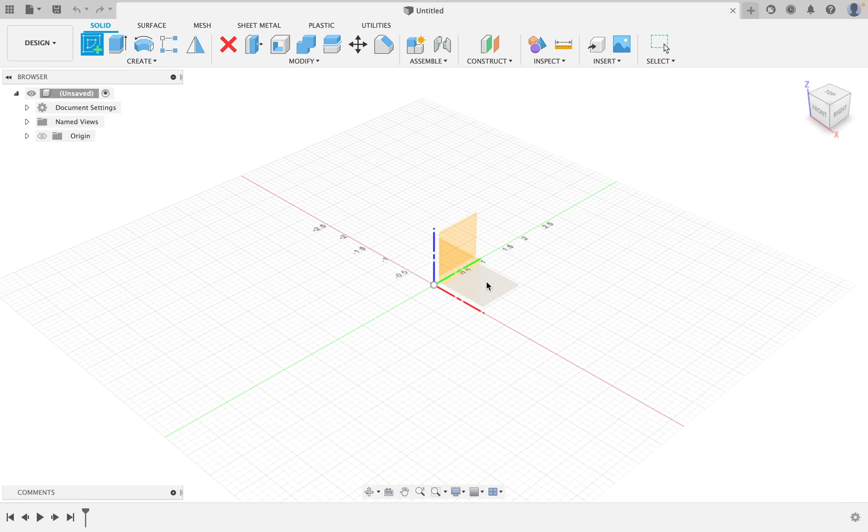We will start today with creating a new sketch, and we will create that sketch from the top, because that will give us the full dimensions, both the length and the width of the shelves. So we will make a shelf for our bookcase.

If I click on this dimension tool here, or push D, I can pick this line and say that it is going to be 23 inches long. I'll pick the outside line and say that's going to be 10 3/8 inches deep. And that is pretty much our shelf.

Now we're going to make some legs. Those legs are going to be offset, and they will be outside here on the corners. We're only going to bother to make one of them, and we will just match that one all the way across. We will hit equals and click on the two sides to turn those into square legs. Now all I have to do is give it one dimension, and those legs are going to be 1 inch and 7/8 square. They'll go on each corner.

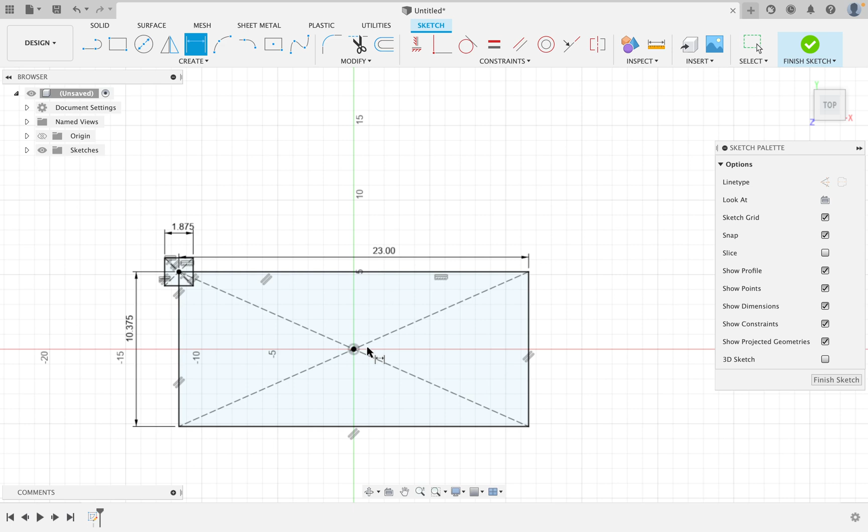That's all we really need. We're going to have those legs, we're going to have some bracing, and we're going to have these shelves that will go into our legs. Okay, so I will hit Finish Sketch.

I should probably mention this is one of two different bookcases we're going to do, so this is just one part of our daily class. So let's make some legs. We're not really all that sure how tall our legs are going to be at the moment.

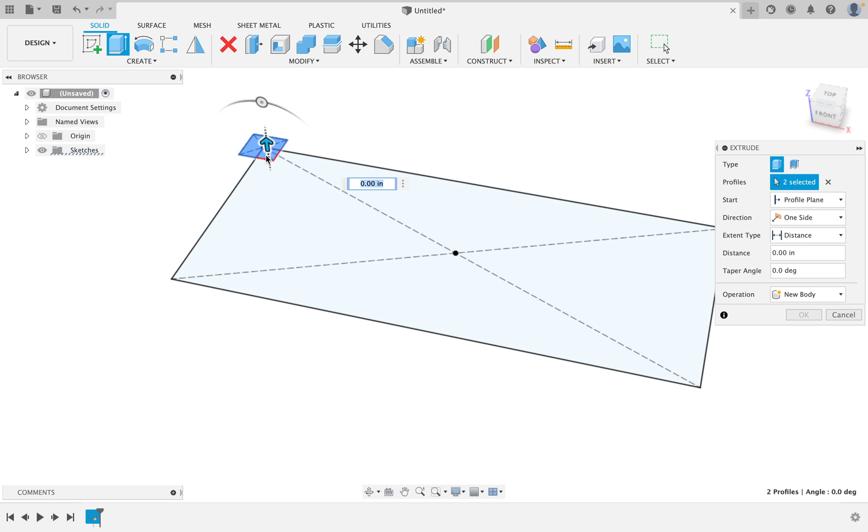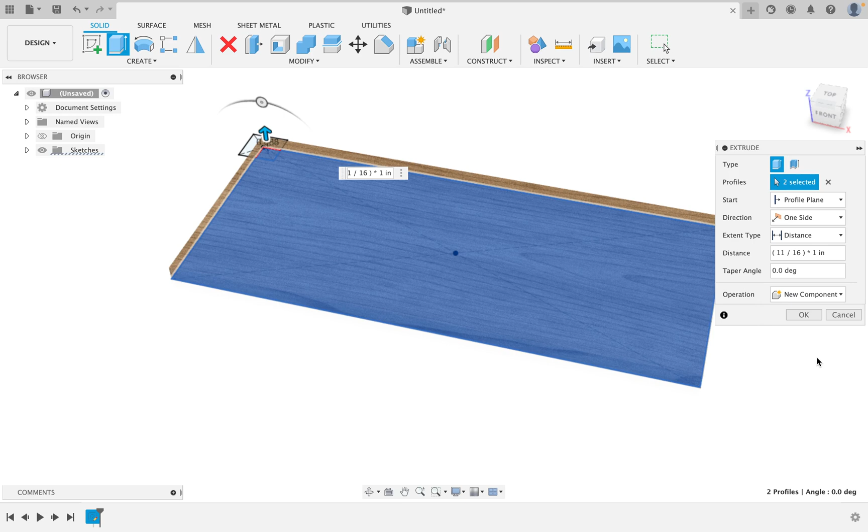So we'll start off with our shelf. We will click our extrude tool up here, select the two pieces of our shelf because it overlaps with the leg and we want to make sure that that is not a problem. And we are going to make our shelves 11/16 thick and say New Component. We'll rename this just by double-clicking on it and typing shelves, so we don't get confused. We now have our shelf.

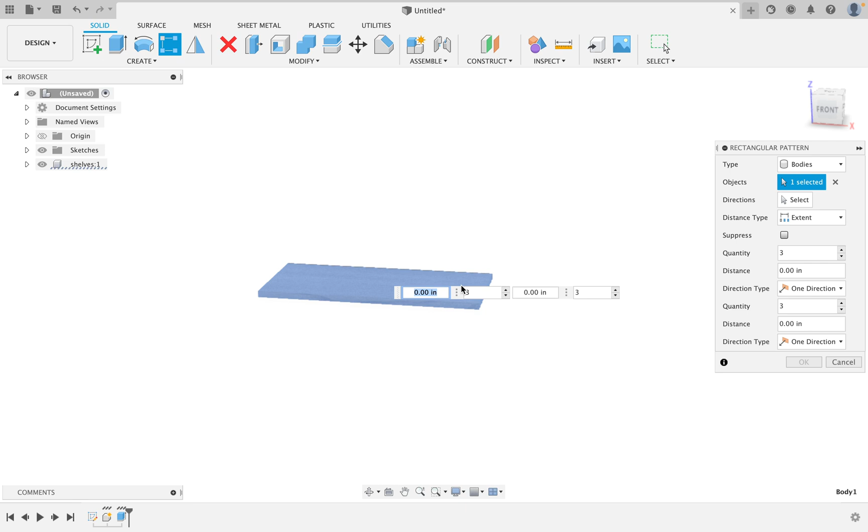We can zoom out by rotating the mouse wheel and see that shelf in its situation. If we hit this rectangular pattern tool and pick our shelf - oh wait, no, we need to pick it as a body - and we say that we want to have this move in the upward direction, vertical. Now we can see we have 3 shelves. Now I want 5 shelves, so I will change this to be 5.

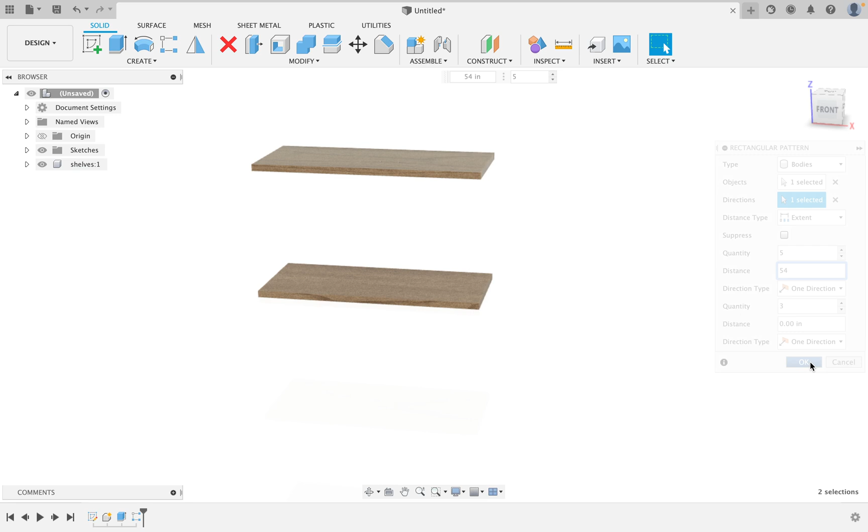And I will say that this extent distance is actually going to be 54 inches. And say OK. Now we have our 5 shelves.

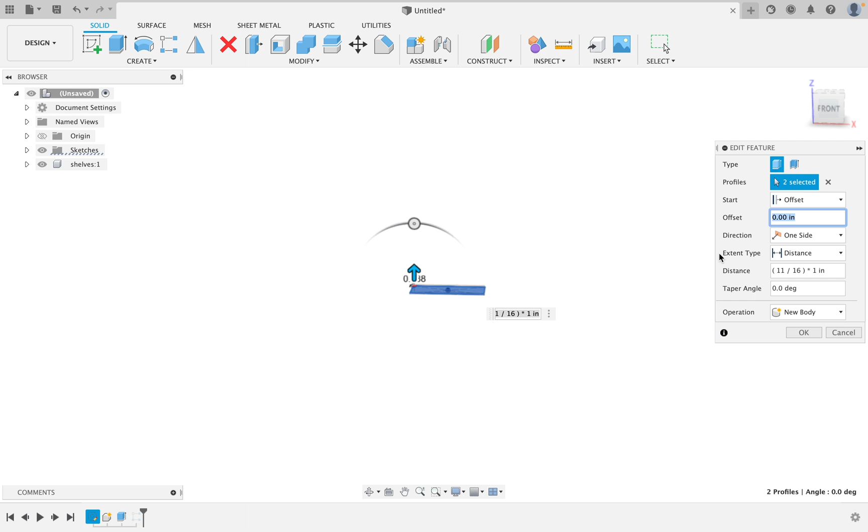Now, I think that first one should probably actually be a little off the ground. So I'm going to go back. Because we are using this modeling software that allows us to change anything in our history, I can right-click on this feature and hit Edit Feature. And instead of it being on the ground, on the profile plane, I'm going to say Offset. And I'm going to offset the first one 7 inches up.

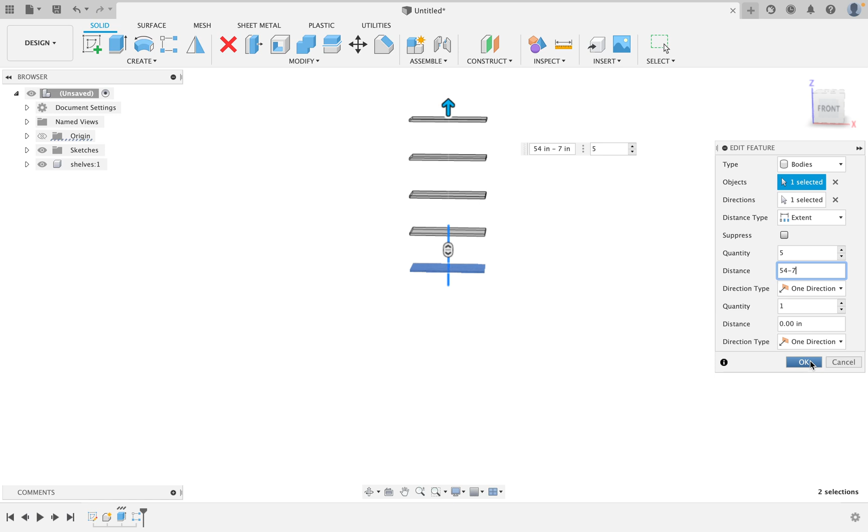Now, of course, I will need to right-click on the pattern, and I will need to change this because it is now 54 inches from the bottom shelf. But I don't want 54 inches from the bottom shelf, I want 54 inches from the floor. So we will say 54 minus 7. I could do that in my head, but the fact that it will calculate it for me, it will remind me why it looks like that when we get to it later.

Okay, so I will turn back on the sketch where we have the other piece. I'm going to click on Extrude again and do exactly the same thing, except I'm going to do it with the leg. Now I want that leg to go all the way to the top.

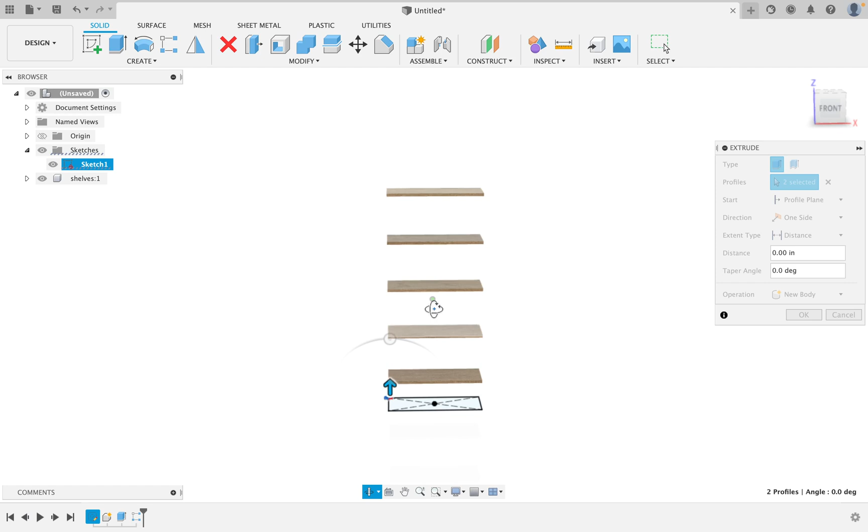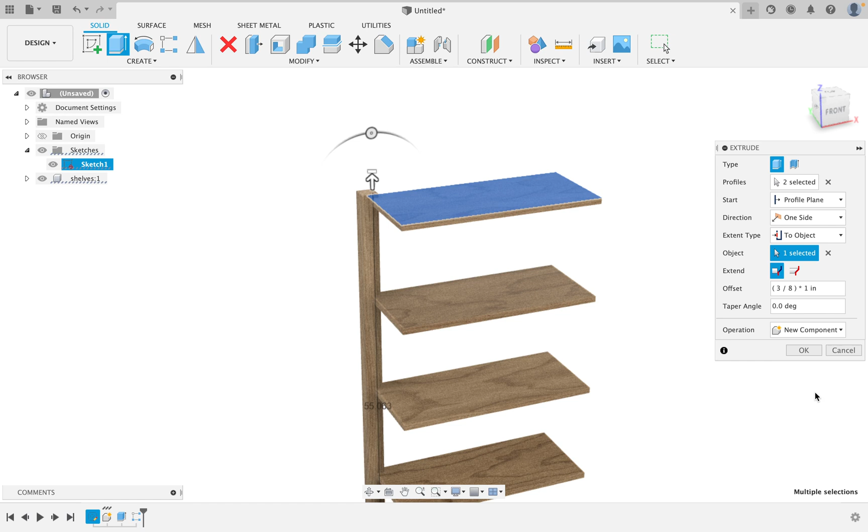I know that that's 54 inches up, but in case I want to change it, what I'll do is set this to Object, select the top face, and it will draw all the way exactly to the top face. Now I want it to go a little beyond that, so I'm going to say my offset is 3/8, and it will go 3/8 of an inch up beyond it, and I will say that's a new component as well, and hit OK. I'm going to call that legs.

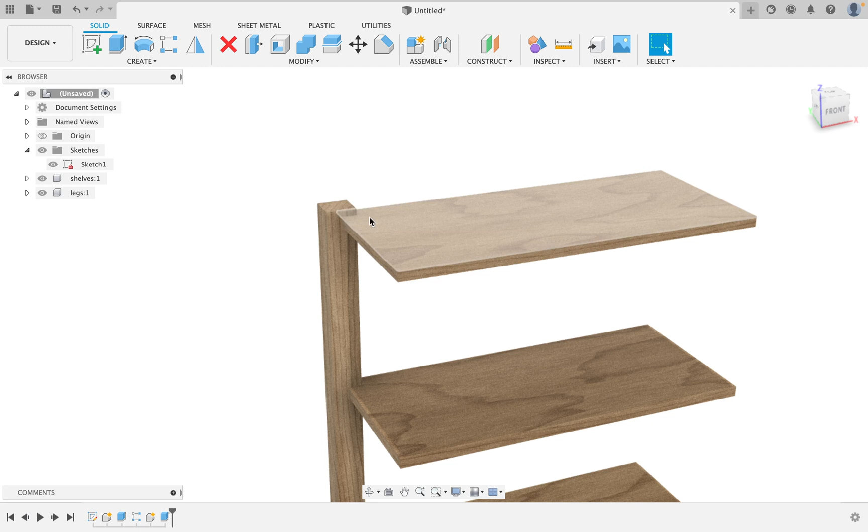Now, I want that leg to go up and through each of the shelves, but how are we going to attach those shelves? There are several different ways you could attach them. You could have a bracing piece, or dowels go straight through into the shelves themselves. I think what we're going to do is create a little brace for each of these.

So I'm going to create a mirror. I'm going to mirror the body of this leg, selecting the center in this direction. And I'll hit OK.

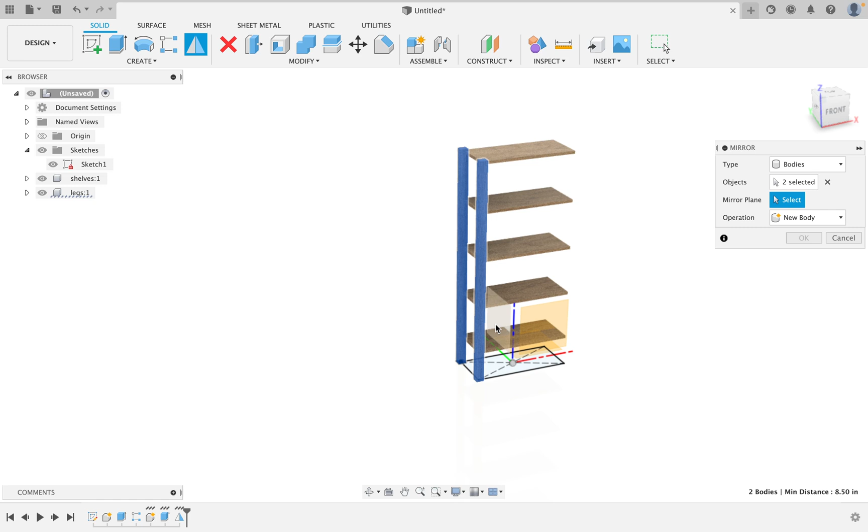Now, to repeat any command in Fusion, you just right-click on the background and hit repeat. I'm going to pick these two legs and mirror them across the center in the other direction. When I hit OK, now I have 4 legs. It already looks like a fairly interesting bookcase, right?

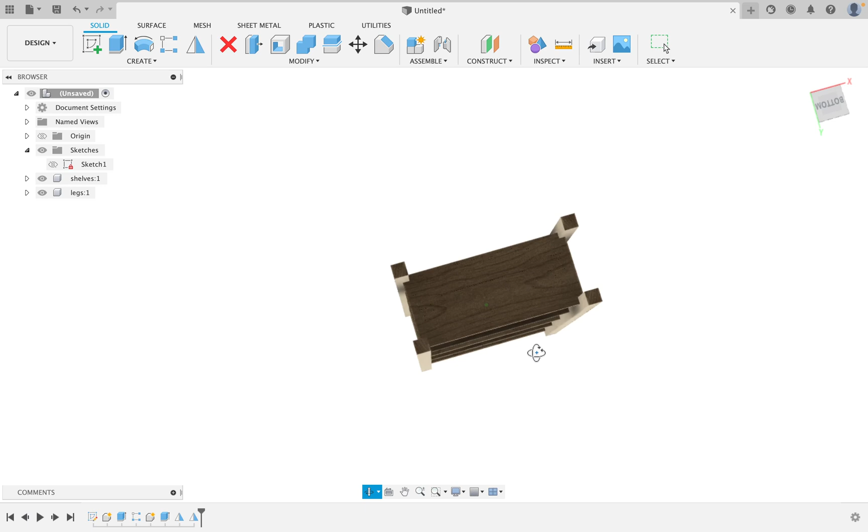So the only thing I want to do is create some bracing. I think the bracing should be interesting, so I'm going to flip this up on its back, turn off the sketch we already have, and create a new sketch right here on the bottom of the shelf. You could do this in pretty much any plane that floats in that direction, but I think this works quite well.

So I'm going to hit P for project, and copy these 4 legs that we just created into our sketch. Now remember, we didn't even create these in a sketch before, but we can just use those dimensions that we have.

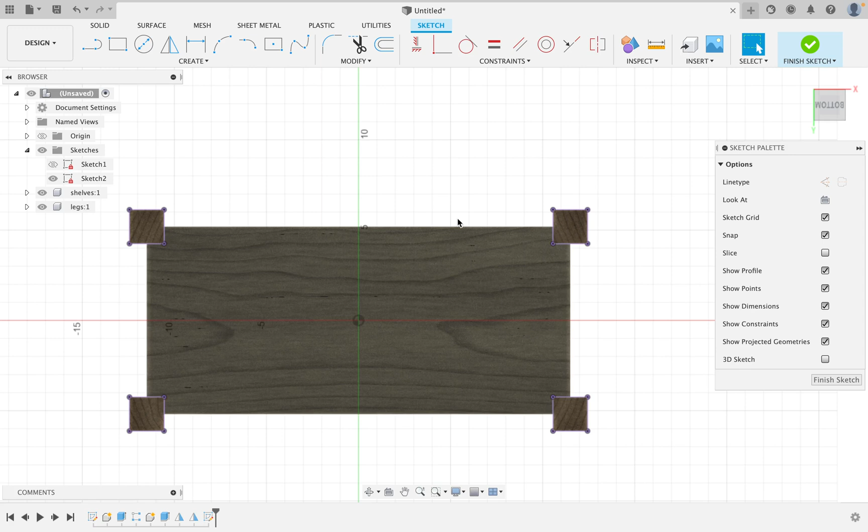Now I'm going to join up from one leg to the other. And you can see it's already chosen that those are parallel. Now I could pick them manually and hit parallel if I didn't quite get that, so that is not something you need to worry about.

Now I'm just going to tell it that I want this, with the dimension tool, to be exactly 7/8 of an inch thick.

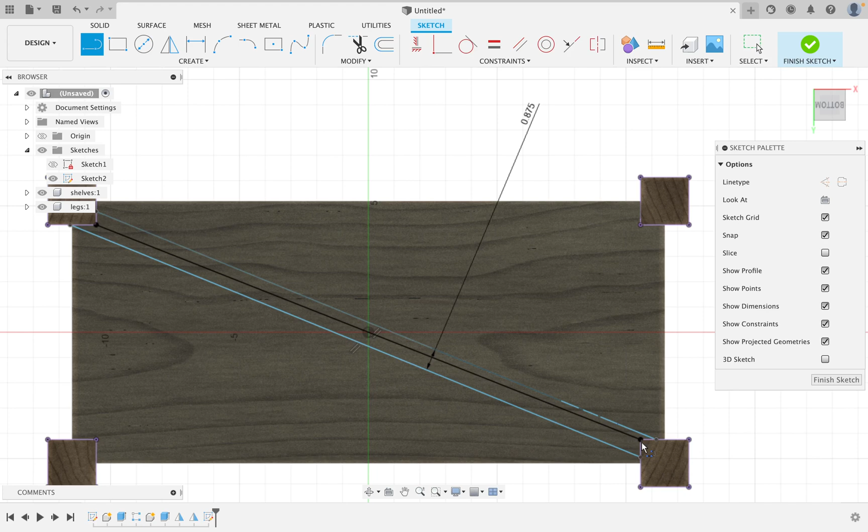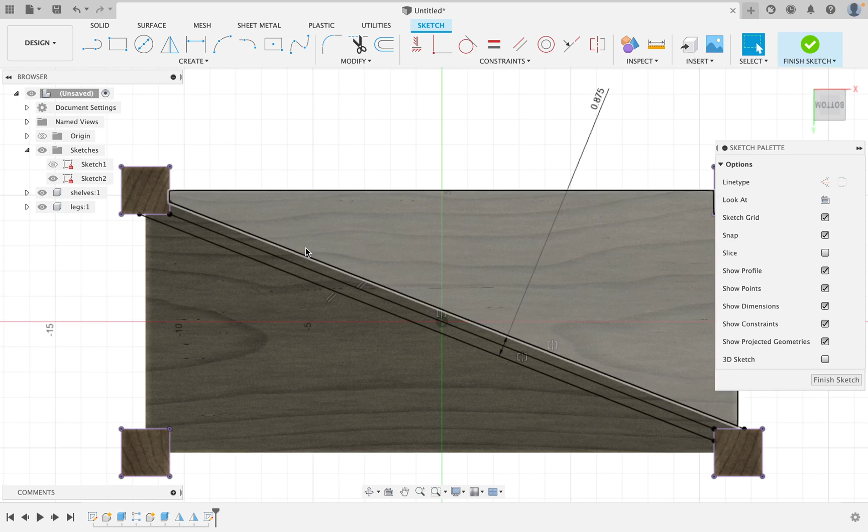I'm going to draw a guideline from the center of one to the center of the other, and make these symmetrical around that guideline by picking them, hitting the symmetry tool, and choosing that guideline. Now the problem with that, and this is the way things are typically done in industry, is having these through the center point is going to make this visible on the outside. So we're not actually going to have those symmetrical around that point. That is how this would normally be done, but it doesn't really quite make sense to do it that way.

All right, so how are we going to do these 2 points? What we're actually going to do is have it go from the outside to the inside on each of these, and have this be squared off on both ends.

So we will draw a line that connects the 2 endpoints, and another that connects the 2 endpoints. And we are going to use our perpendicular constraint to go between these pieces. They will both be perpendicular. And that should do it.

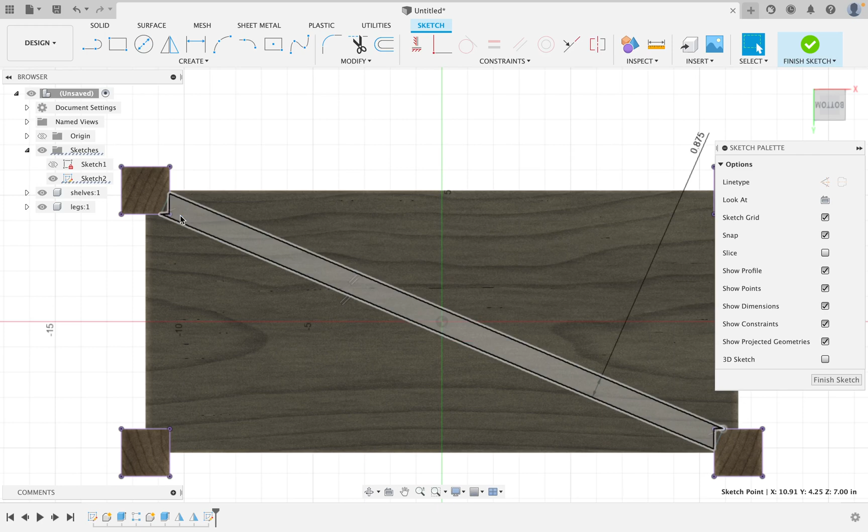So now we have an offset rectangle, and it is exactly in the right place. Now, it is still blue, there is something that is willing to move on us here. I'm not quite sure what it is, and we're pretty much going to ignore that because it's already in place. We know where it is in our model. Sometimes Fusion has a little question about where things actually reside in the model, and that's perfectly okay, it's just sometimes a little difficult to figure out where it is.

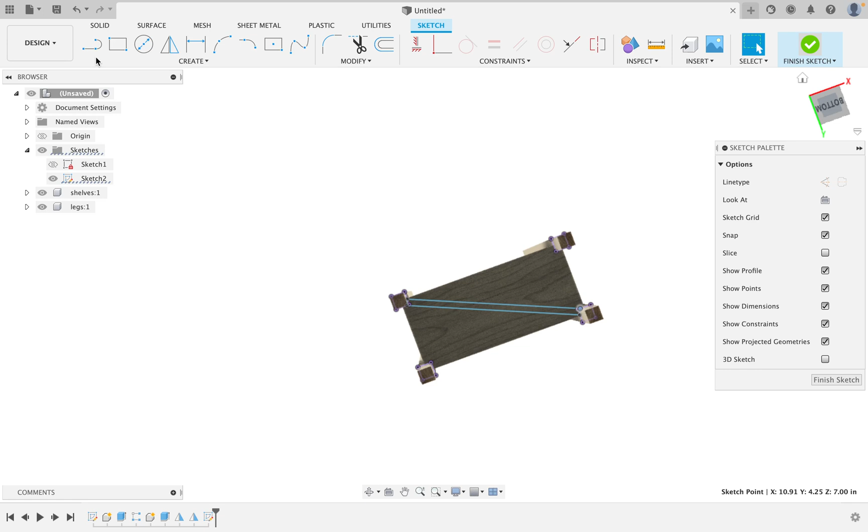If we were going to build this, that would be sufficient for our needs. So we're going to hit extrude, and we'll extrude this piece. Let's see what direction it's going. It's going down, which is the direction we want, and we want it to be exactly 5/8 thick. We don't want it to join, we want it to be a new component, and hit OK. Not bad.

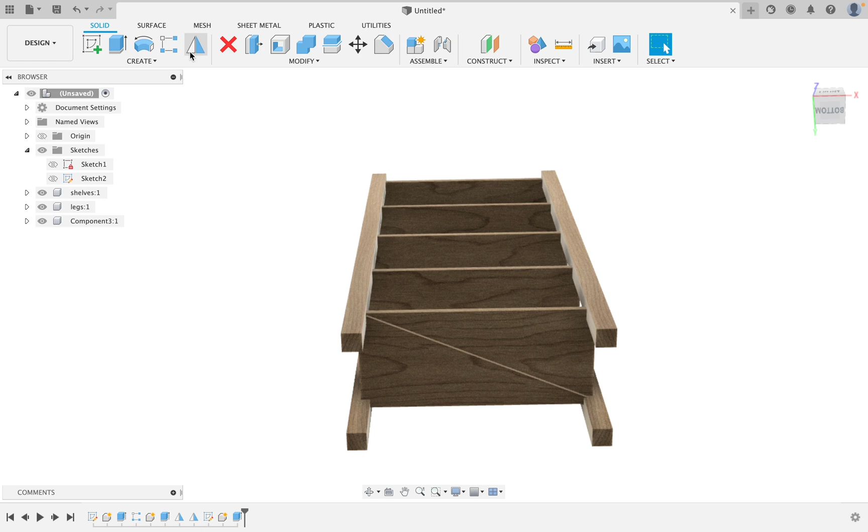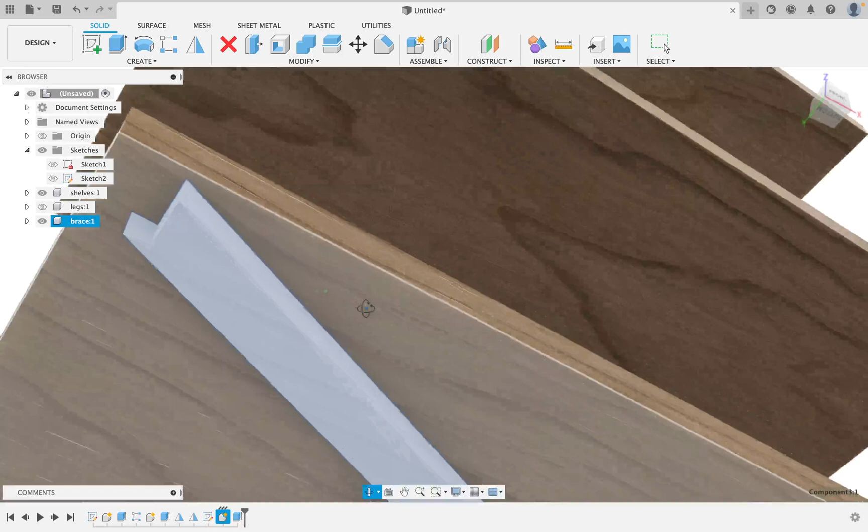Now, that one is a great little brace, but what I actually want to do is add a little bit of joinery on the thing. What we are going to do with that is add a tenon. So if I turn off the legs, I'll rename this to be brace, and I am going to make a round tenon from a dowel.

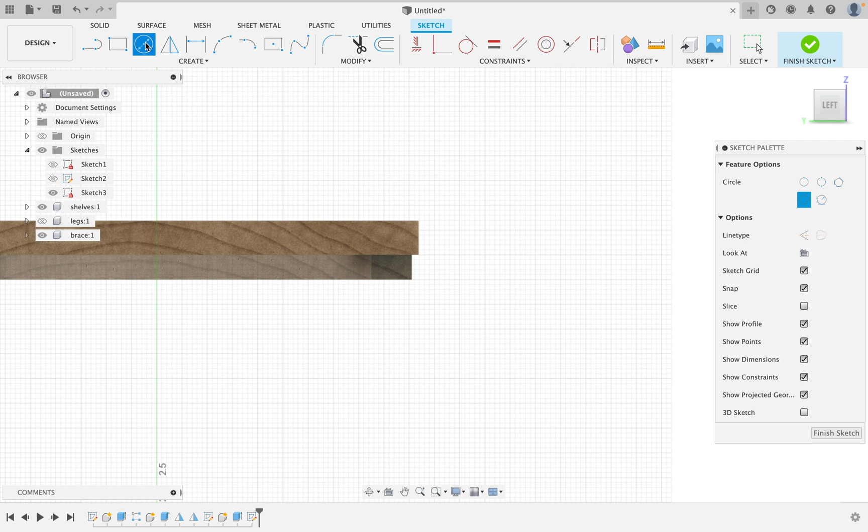And we are going to put it right through this piece here. It's only going to be a very short tenon, but that's all right. We will click on the New Sketch tool. I am going to make that tenon on the edge here.

We will make that a 1/4 inch dowel by hitting Dimension and putting in 1/4. We are going to tell it that we want it to be 1/4 of an inch from the top and 1/4 of an inch from the inside. That will tell us exactly where it is.

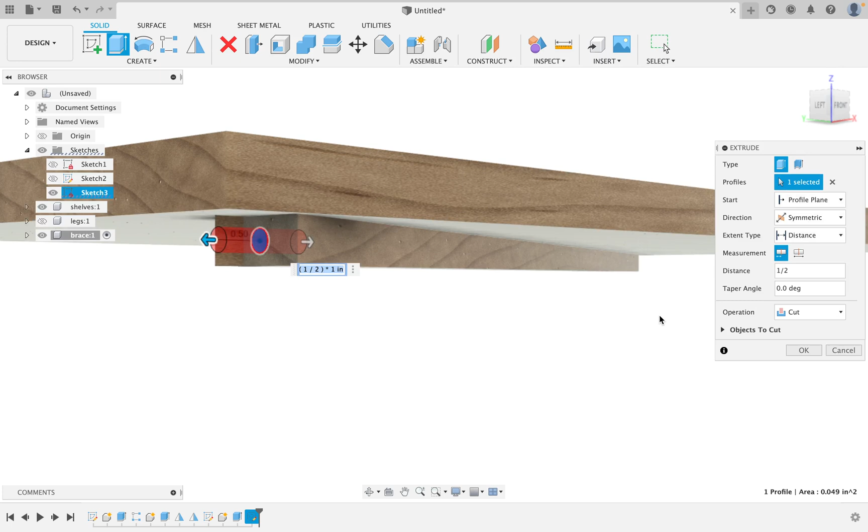If I hit Extrude and click on it, I can say that I want it to be symmetrical, and I want it to be 1/2 inch long. You can see where it's actually going to draw it right there. It's cutting at the moment, but what I want is for it to be a new component. I will hit OK, and now that is our little round dowel tenon.

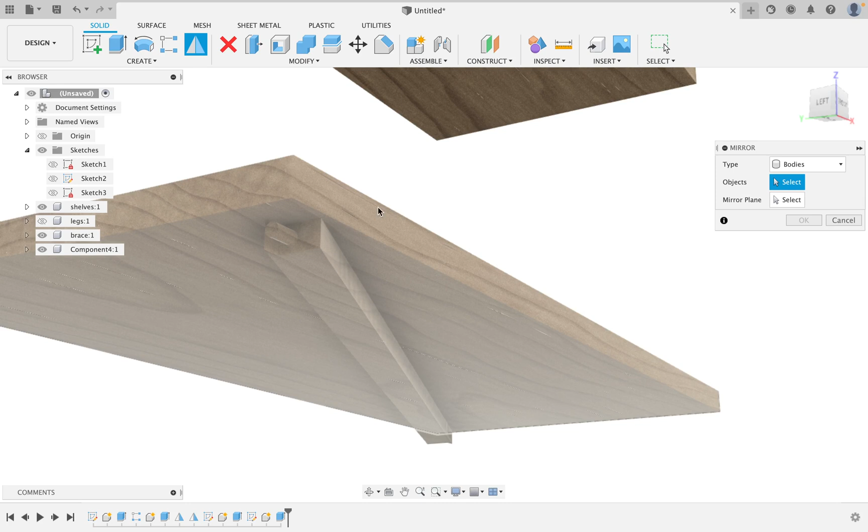You can see why I put it offset away from the center, because we don't want it to poke out the other side of our brace. Now, there's only one of them, so we want to hit Mirror. We want to take this object, and select it. We will pick a mirror plane, and we will mirror it across the center line.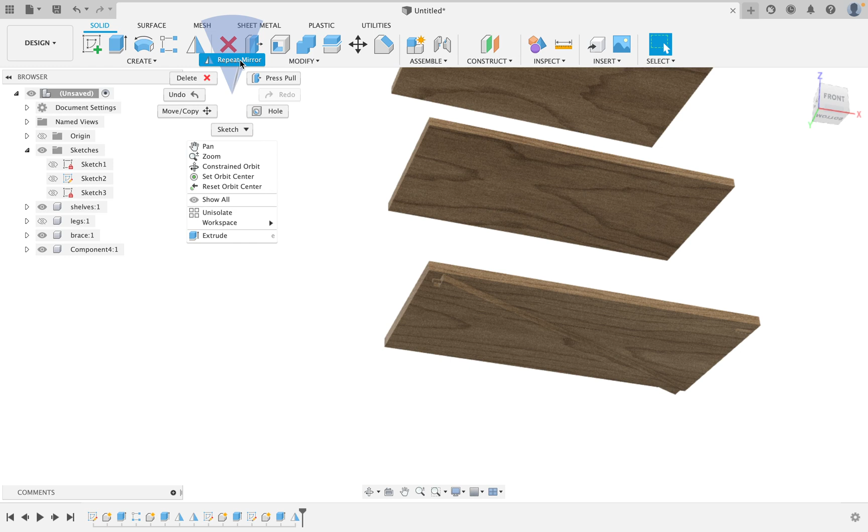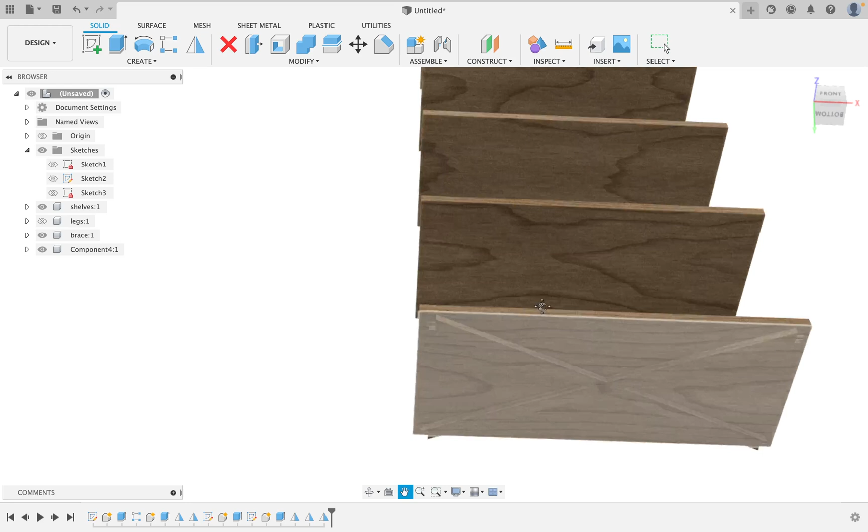Now, it's not actually going to go the place that we want it to go at the moment, but that's not something we really need to worry too much about. We will right-click and hit Repeat, pick them both, and mirror them across the center line. Now, one of those is going to end up exactly where we wanted it, but we're not done yet. We will repeat and mirror across that same center line the first brace, and now we have all 4 dowels and both braces that are interconnecting.

Now, what we actually want to do is have a half-lap joint here in the middle. So I'm going to turn off the shelves, and what we need to do is cut in our joinery. There are 5 or 6 different ways I can think of to do a half-lap joint in Fusion, but this is the one I always keep coming back to.

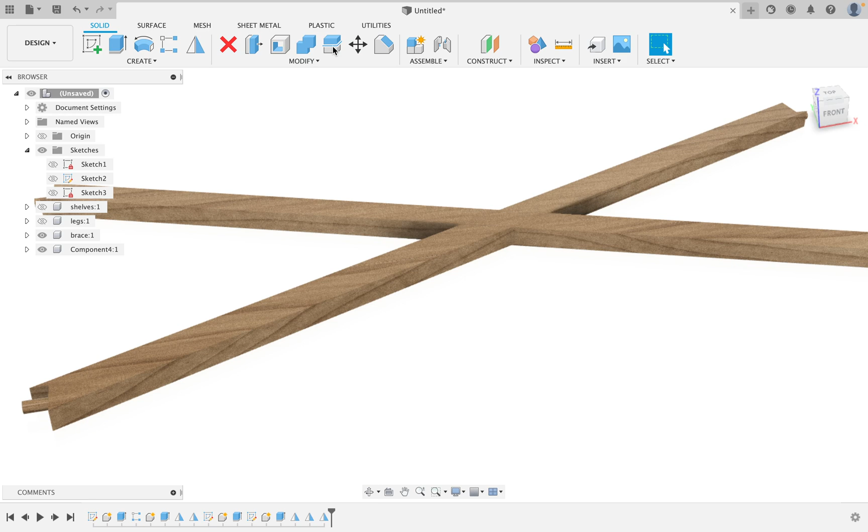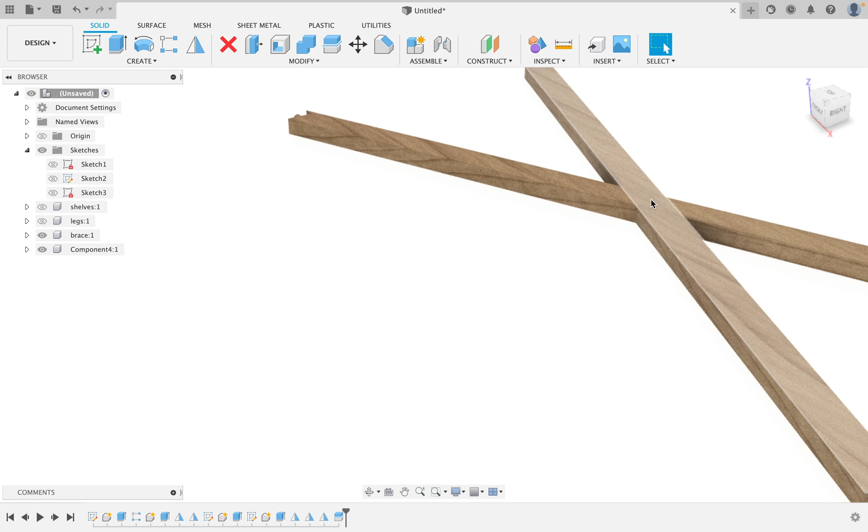I will hit Split Body, and I'm going to split this body using the outside faces of the other. Let's see if I can select that properly. Scroll over, and I'll pick these 2 faces. So now I have an in-between piece. If I open up the braces here, I can see I have this little piece in the middle here.

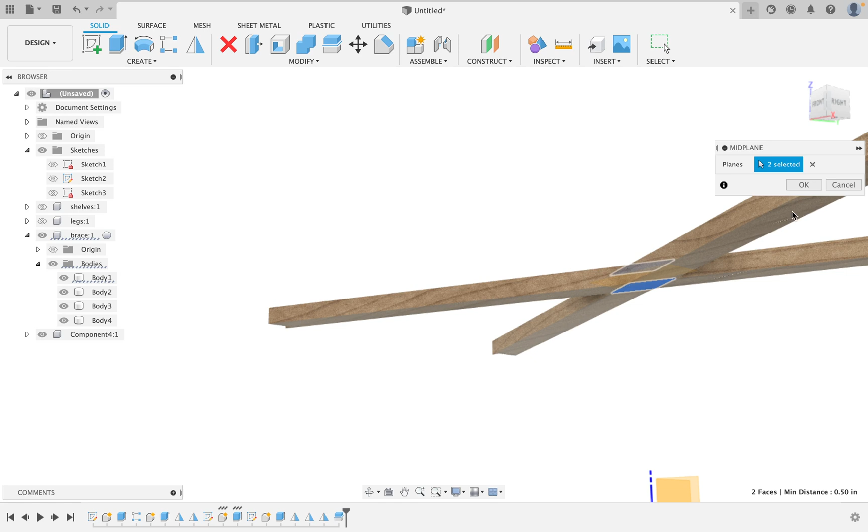And I need to cut that in half. So I'm going to go in here and say Construct Midplane, and I will pick that it is going to be between this face on top and this face on bottom. That is a plane right through the middle, and I'm going to, where did that body go? Yes, that one. I am going to cut this body using the plane that we just created.

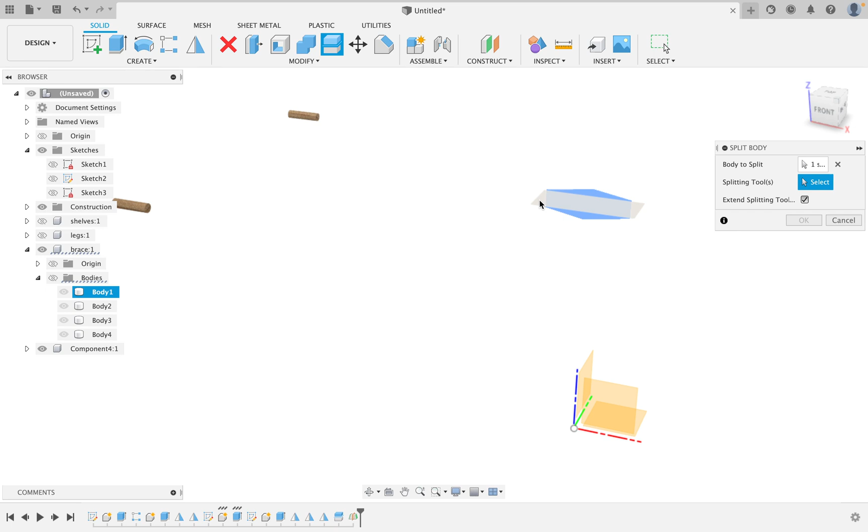Wherever it has gone, it is in here somewhere. We can just turn off these bodies and pick this plane. We'll turn them back on. And now we have a top and a bottom half.

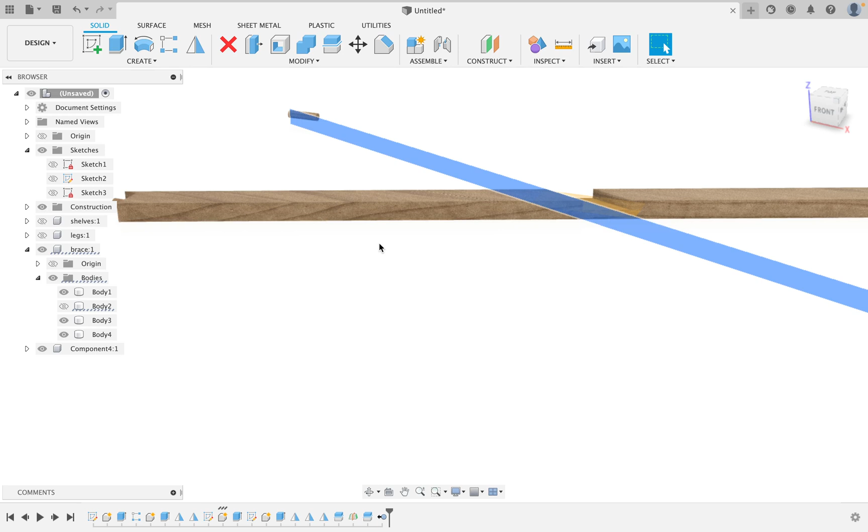Now we'll just get rid of one of those 2. And we will turn off the other leg. This leg is body 2, so we'll just turn it off. And now you can see we've actually got our half-lap joint cut in half.

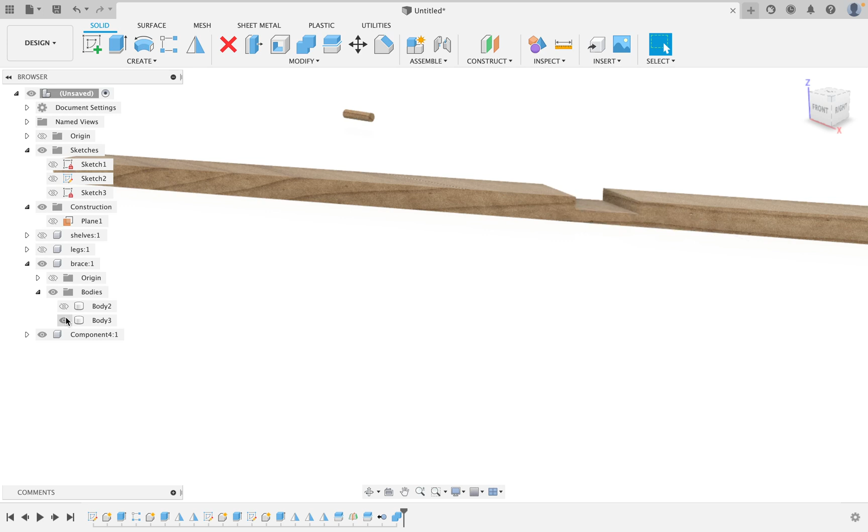What we need to do, though, is put those pieces back together. So we will take one of these bodies and join it to the other 2 and say OK. And now we're back to having only 2. But one has a half-lap cut in it and the other does not.

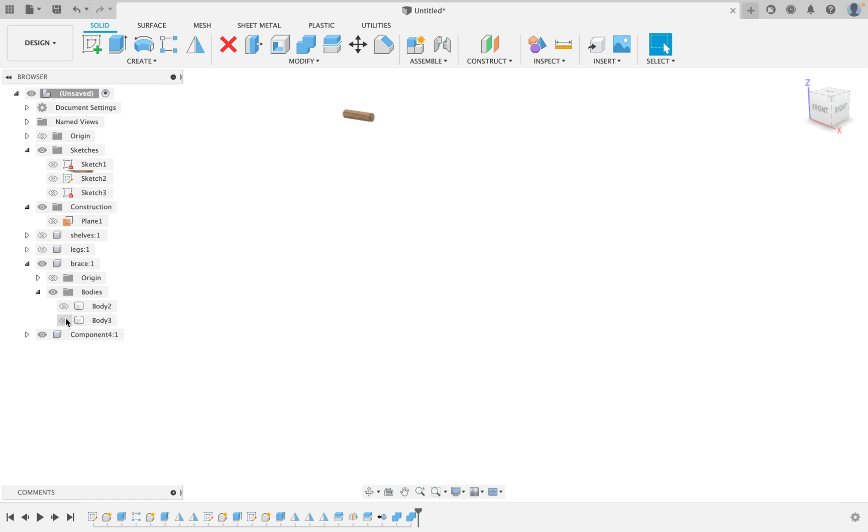So what we'll do is we will cut using our Combine tool. We will cut our big one, say Cut, keep the tool, because the tool is the other piece, and cut it with the first one. And now if we have one turned on, we can see that's the bottom half, and the other is the top half of our half-lap joint.

I'm going to call this brace before we forget what it is. And now we have one of our braces, and that is complete, and the joinery is done. So we will turn these back on and take a look at what we're doing here.

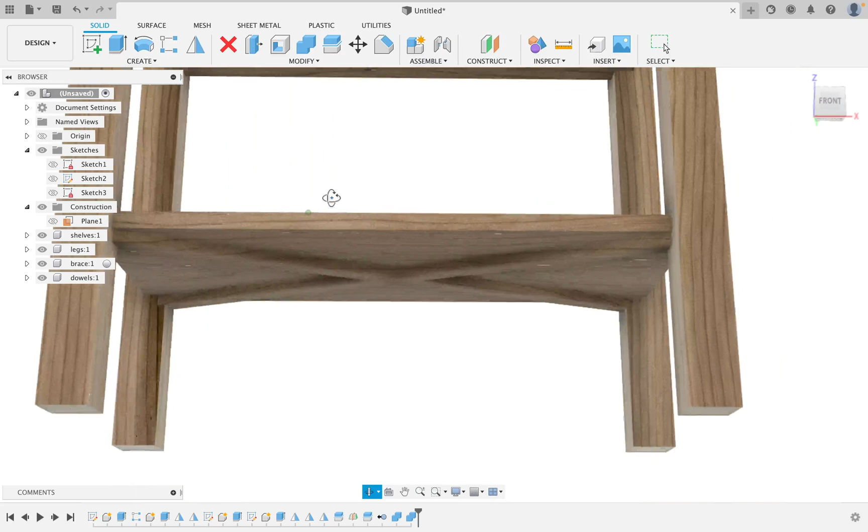What we'll do is we'll say rectangular pattern. We're going to copy the braces. We're going to have these go in the direction up, so we pick up. There should be 5 of them. And again, we go 54 inches up.

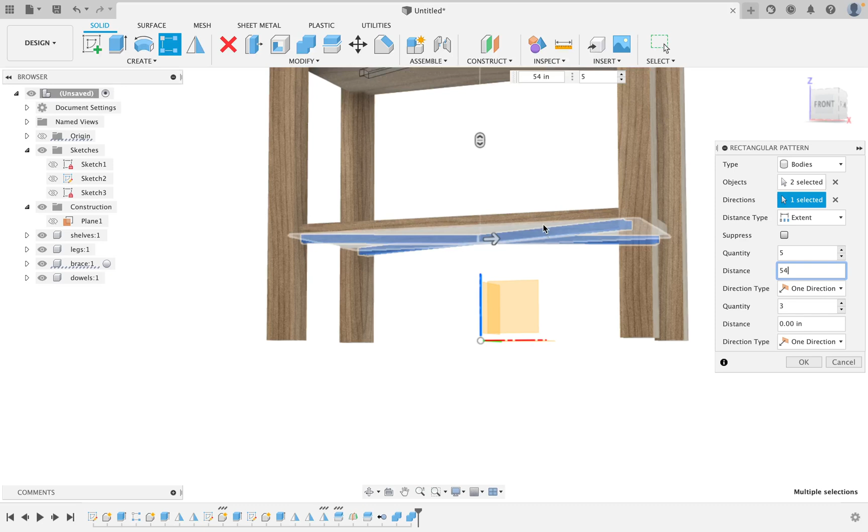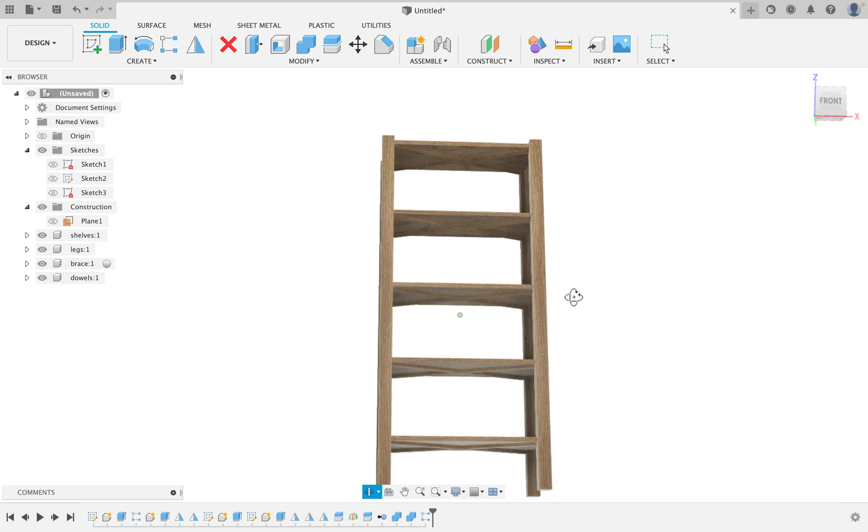Actually, I think it's 54 minus 7, wasn't it, that we were doing? 54 minus 7. And if we do that, the total is the same, the starting place is lower, and the ending place is lower, but only by exactly the amount that we want it to be. So you can use the same spacing or the same extent to duplicate components across a wide variety of places.

And that gives us our joinery on those. The shelving we are going to have to attach using some method so that we can get that on there solidly. But for the moment, let's cut the rest of those dowel joints right into our legs.

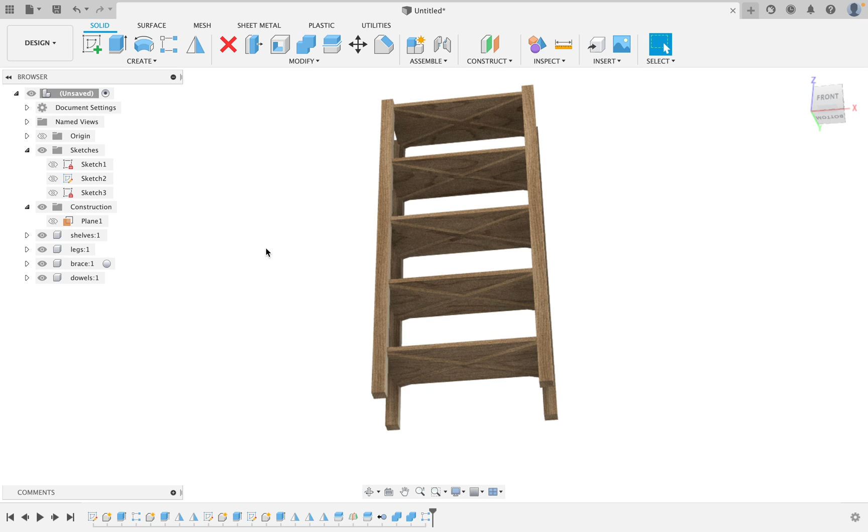So if I open up the dowels and I look at our bodies, we only have the 4 on the bottom. So we're going to say again, rectangular pattern, direction up, change this to 5, and call this 54 minus 7.

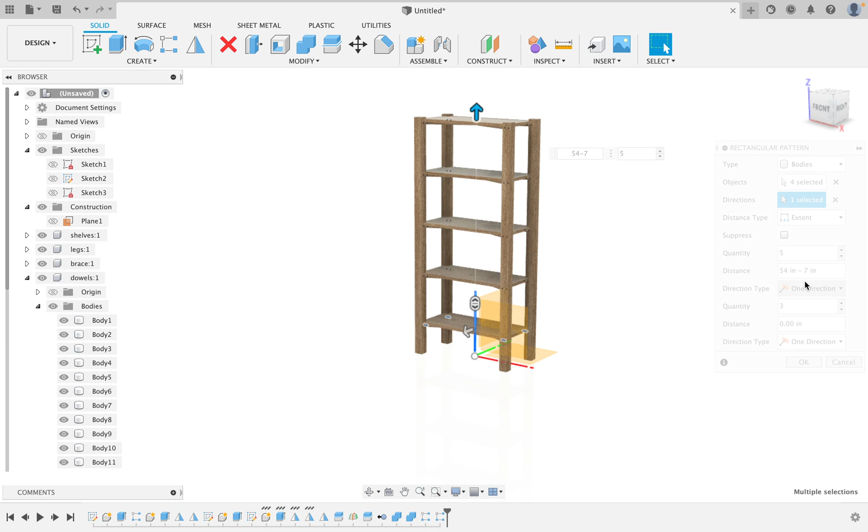When we hit OK, we will now see that we have dowels all the way to the top of our piece. Now the only thing we need to do is cut those dowels into the legs, which will allow us to have our joinery finished.

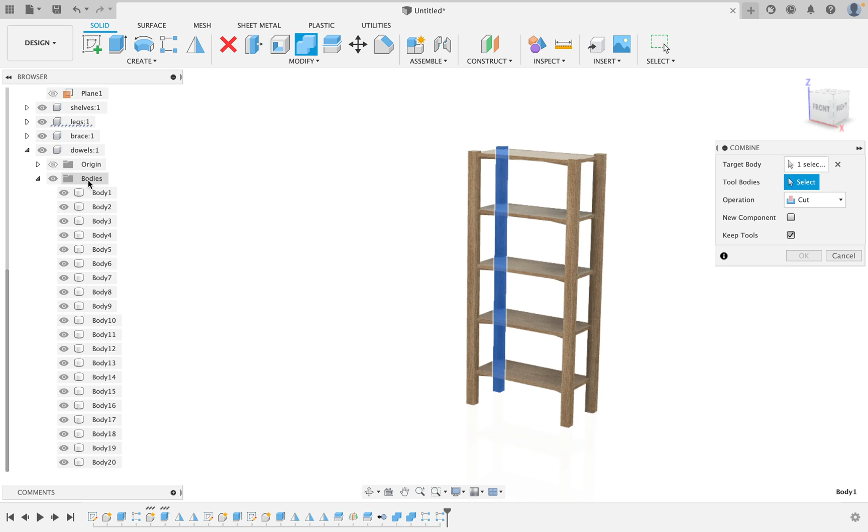So I'll pick a leg, pick a body, select them all, and hit OK. I'll repeat that for the other 3 legs, and you can just quickly repeat.

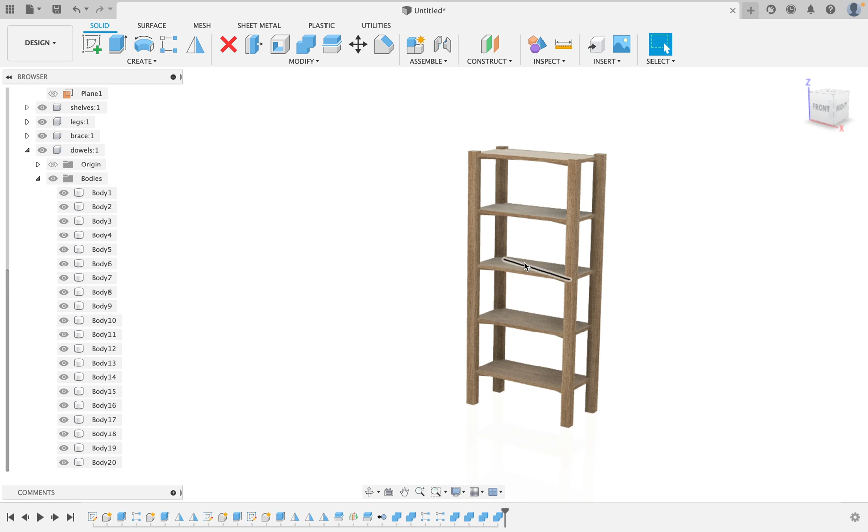Now the interesting thing, and this is why I didn't do it before, is the order does matter where you cut these things. So when I made this brace down here at the bottom, I needed to cut the dowels into the actual brace pieces as well. You need to do that before you duplicate it, unless you want to go in and click each one of these brace pieces and cut the dowels into them. But that isn't very efficient.

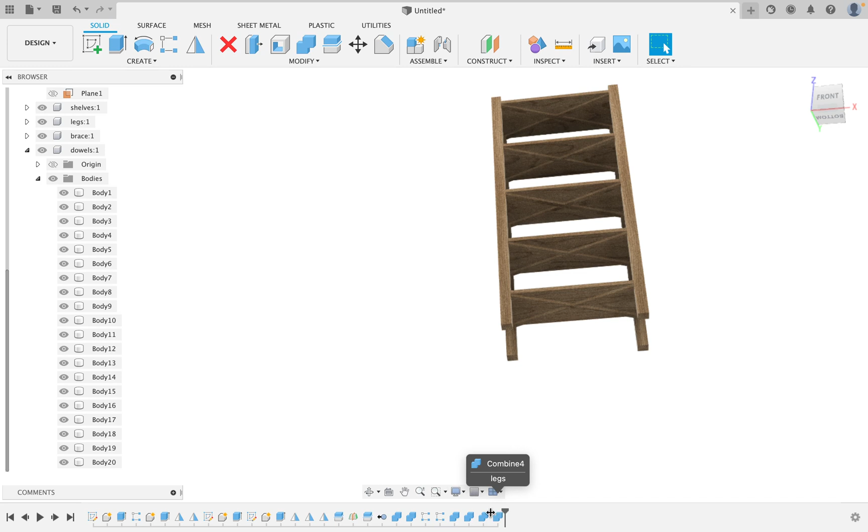Now we've done a whole bunch of steps since then, and it's really important to get things in the right order, because it only makes sense. But does that mean we have to undo everything? Well, no, absolutely not. What we can do is scroll back in time, and that was my reason for showing it this way.

If we go back in time, we can see we only have one brace, and that brace is about to be copied with its dowels. But if I go in here and do exactly the same thing, I cut one brace with the 4 bodies, repeat, cut the other brace with the 4 bodies, and hit OK. We've now added them to the timeline, not at the end, but in the middle.

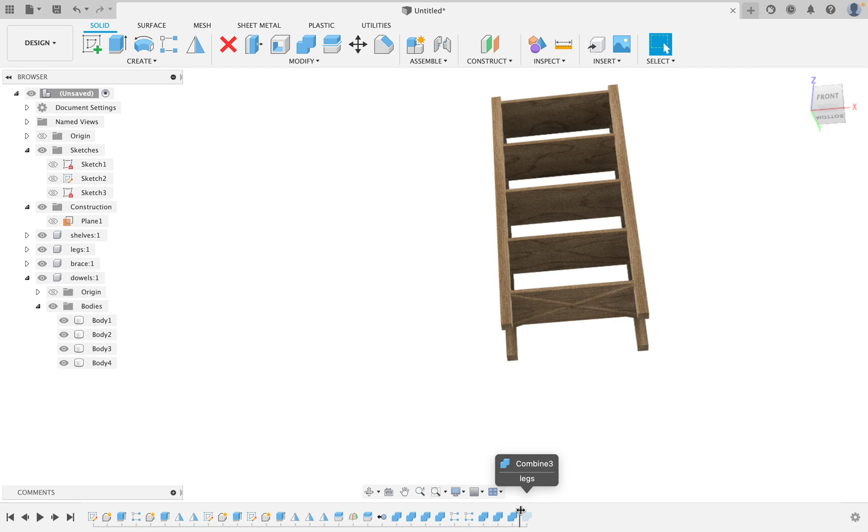And if we scroll to the end, turn off our dowels, turn off our legs, and look right up at one of the top shelves, you will see that it also has the space for the joinery cut in it that we just added to our timeline. So there we go, we have those.

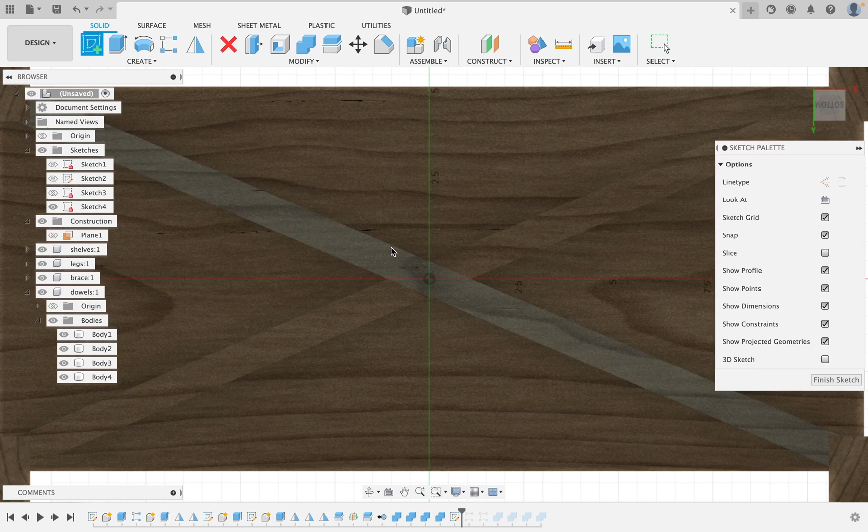Now that's not the only thing we can do if we go back in time. If we go back in time, we can actually do something far, far more involved. What I'm going to do is create a new sketch at exactly the same point in time, and we are going to create some dowel holes that will hold our pieces together.

I'm going to create a line that goes from the center out to the middle of our piece. It doesn't necessarily have to be centered, but I would like it to be, so I am going to try that again and actually get that to be centered.

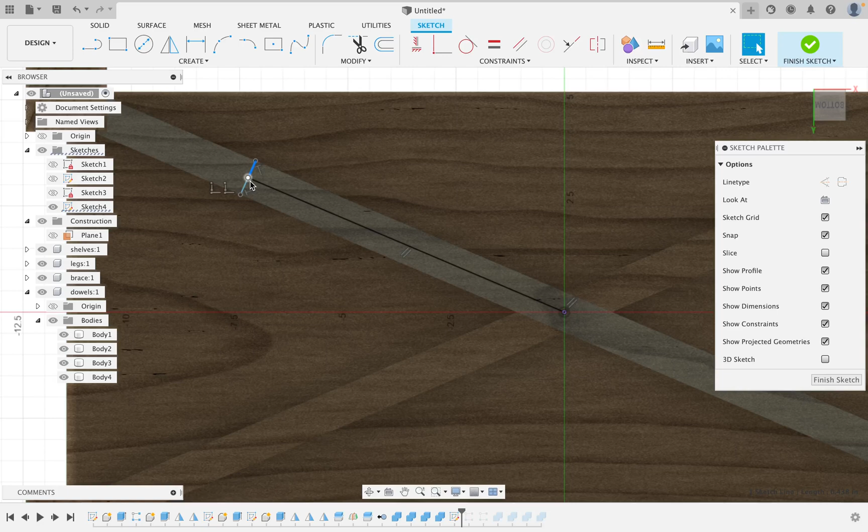We will draw two other lines out to the side, and I'm going to say that these two lines are equal, and that guarantees us that we will be in the center. We'll make all of these guidelines by selecting them and hitting X.

And I will now create a circle. Our circle, if I hit dimension, is going to be 3/8 of an inch. A 3/8 inch dowel.

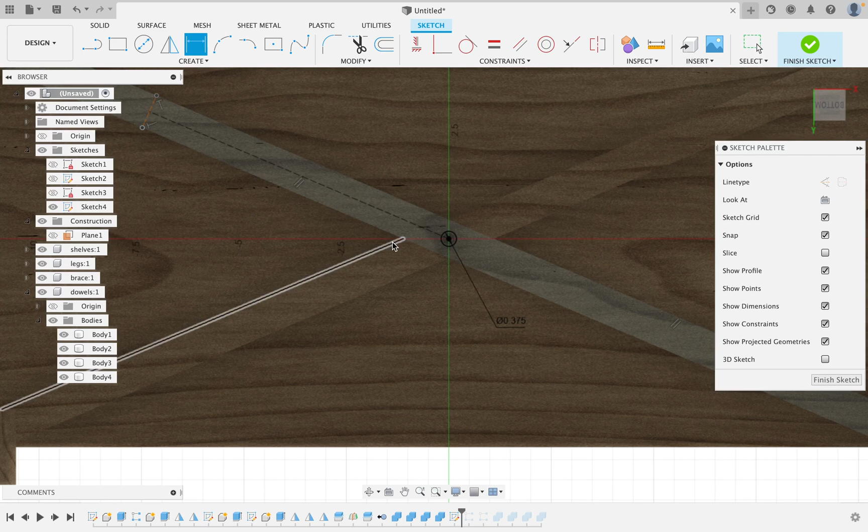And I am going to create a rectangular pattern. I will pick the dowel. I will say the direction will be along this line. Scroll in and copy several of them out that way.

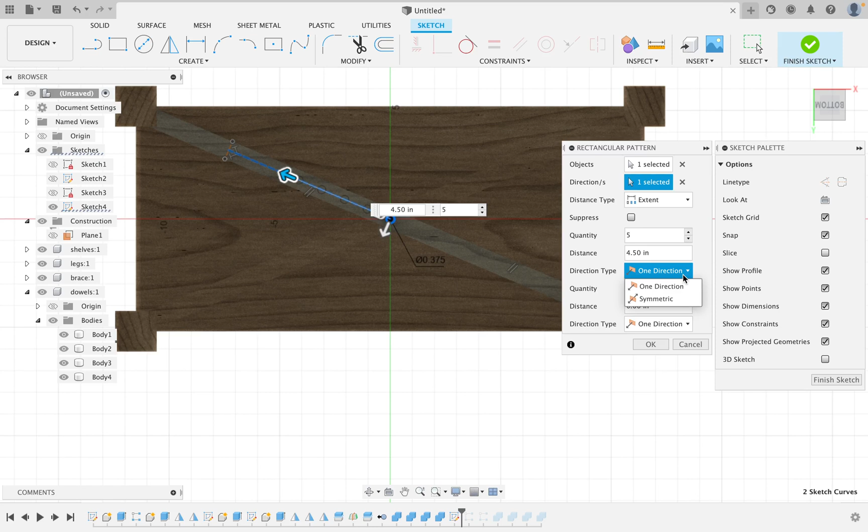What I actually want is to have 5 of them, but not in one direction. I want them to be symmetrical, and I want them to go out considerably further than that. So we have our pieces. I want them to go out 10 inches, and I will say OK. We now have 5 little dowel holes.

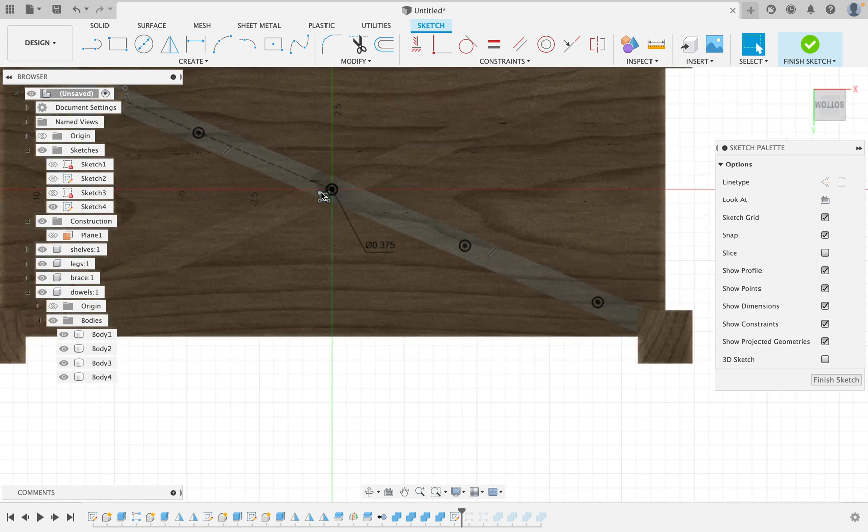So I am going to get rid of the center of these. The center is not going to be as stable in terms of attaching these pieces. I will now say finish sketch. Oh, we'll keep the center. Actually, now that I think of it, we'll say finish sketch.

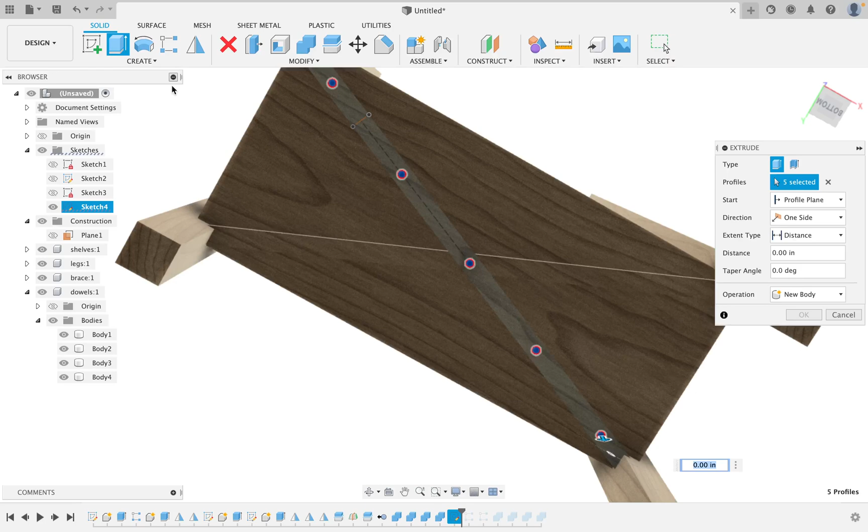And we will hit extrude. We will pick 1, 2, 3, 4, 5. If there were 100 of these, we would use a bulk selection tool, but it's probably faster just to click them than it is to do anything else.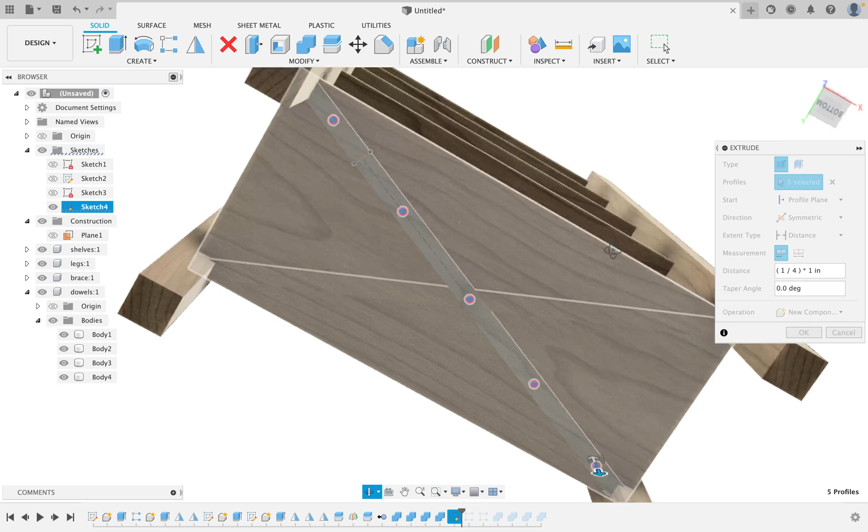I am going to say that these are going to go in 1/4 of an inch. They're going to go symmetrically 1/4 of an inch. And I will say new component. We can scroll up and see exactly where they're going to be. They're going to go 1/4 inch in both directions.

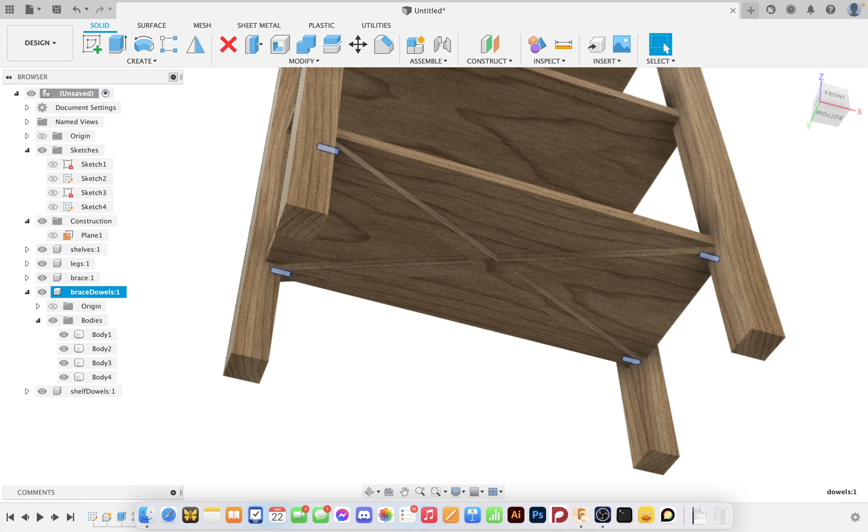I want them to go from the bottom of the shelf in both directions. If we turn the brace off, we can see we have these dowels going into the bottom of the shelf. I'm going to call these shelf dowels. Actually, I think I should go back and rename this to be brace dowels.

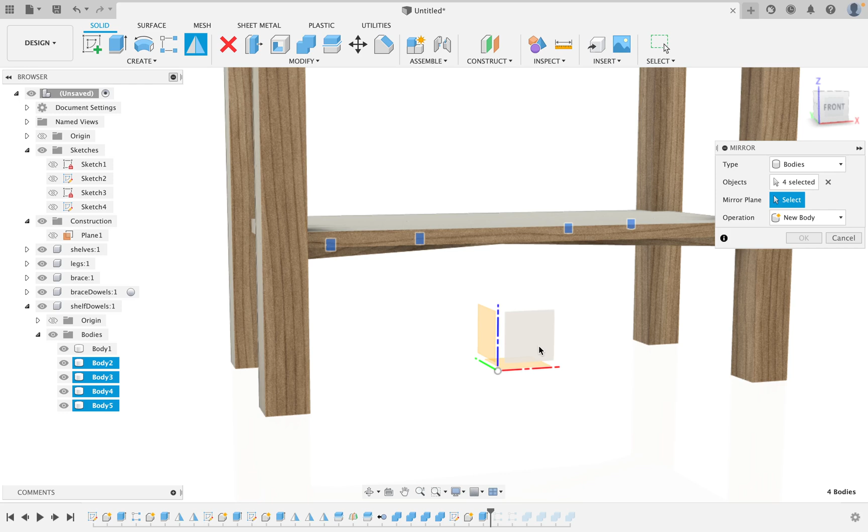It's always a good idea to keep things organized. We'll open it up and take a look. We want to mirror these across the middle - 1, 2, 3, 4, 5. We'll turn off the center one since it doesn't need to be there, it's already mirrored. We'll mirror these across the center line and say OK. So now we have 9 of these into the shelf.

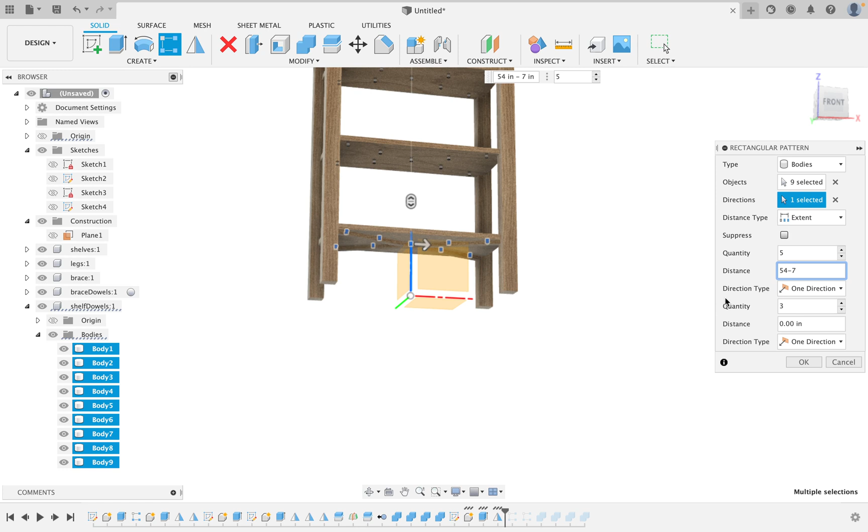Very good. What we are going to do is rectangular pattern these as well. 5, 54 minus 7 - if you keep remembering this spacing, we could save that as a parameter, but for the moment we'll just leave it the way it is. You can see we have now copied them onto every shelf. Not bad. We're going to cut those into the shelf, and we're going to cut those into the brace.

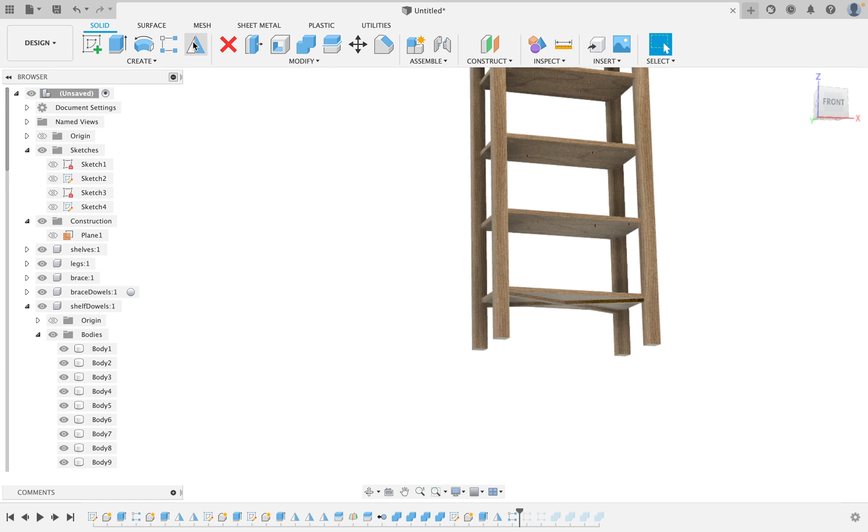So we say combine, brace piece, and we'll cut those in. Doesn't matter which one, we'll just use them all. Anything that doesn't actually touch is going to be ignored when we cut. So you can just pick everything in a folder, everything in a component, and cut using that. All will be good.

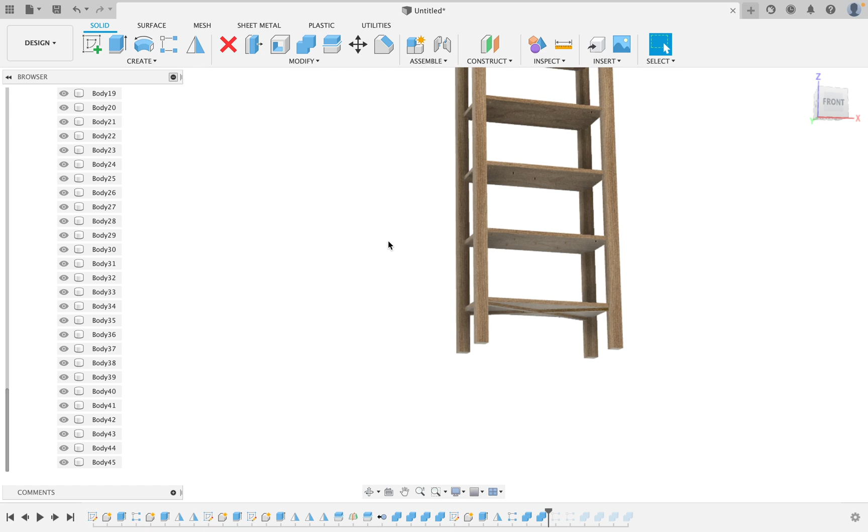Now we need to repeat that same command for one shelf - quite a lot of them. 2 shelves. I've zoomed out quite a bit using all this scrolling around, but it doesn't matter, it remembers where everything is. 3 shelves. A lot of the time there's a fast and efficient way of doing these things repeatedly, but when you only have a few to do, sometimes it's just good practice to do them manually with the mouse and keyboard.

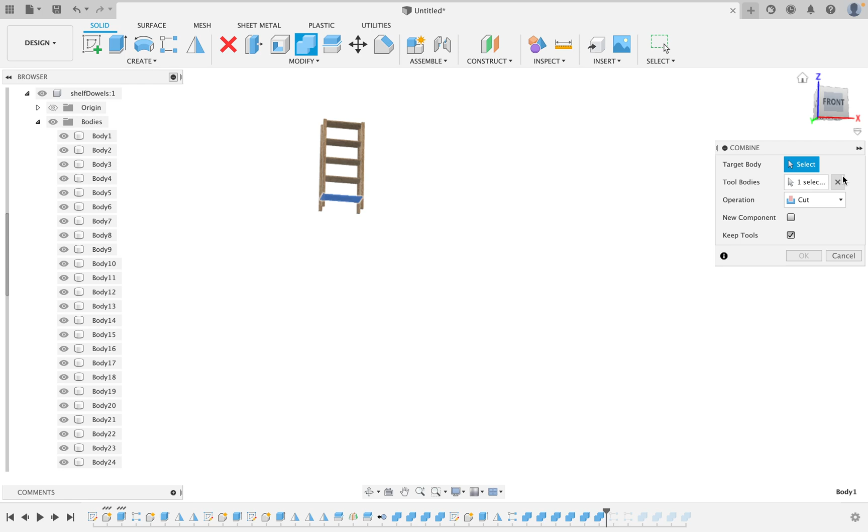I know that sort of goes against a lot of my efficiency statements. But, whoops - target body, shelf, tool bodies, all of these. Okay, it's looking good, looking good. We'll zoom back in and close this folder.

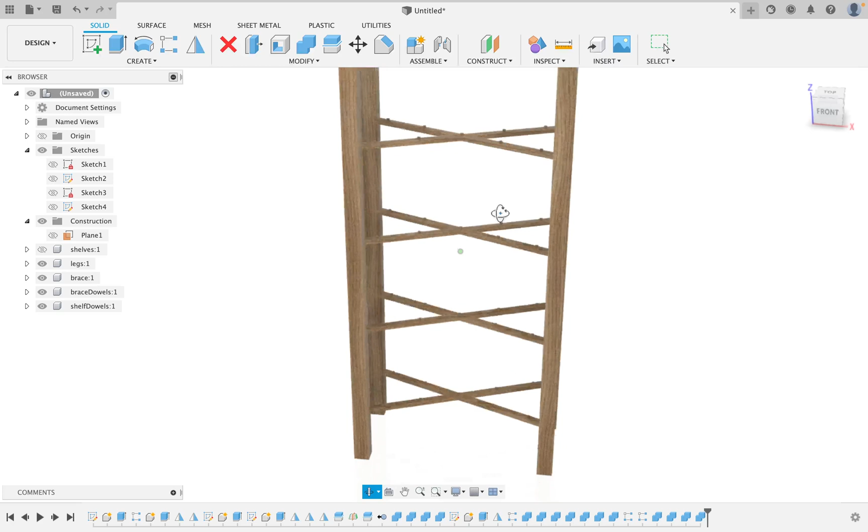When we scroll back to the present and put all our braces back in, we'll now find that if we turn off our shelves and turn off our shelf dowels, we have all the joinery cut into the shelves just the same as it needed to be, because we copied them all after. Okay, so we are good.

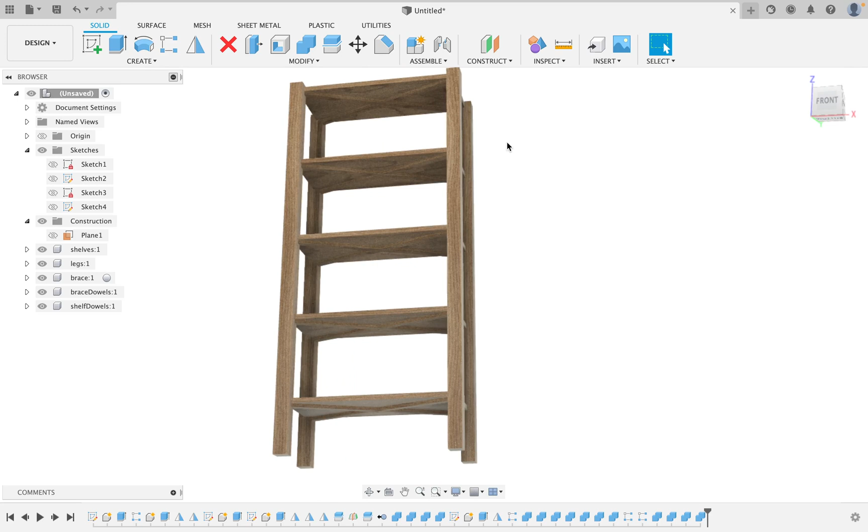I think that looks like a nice bookcase. There's just one other thing we're going to do. As we do in just about all of our somewhat intermediate videos, we'll hit A for appearance, and we'll think about how we want this to actually look. Could we make it out of solid maple the way we have done it here?

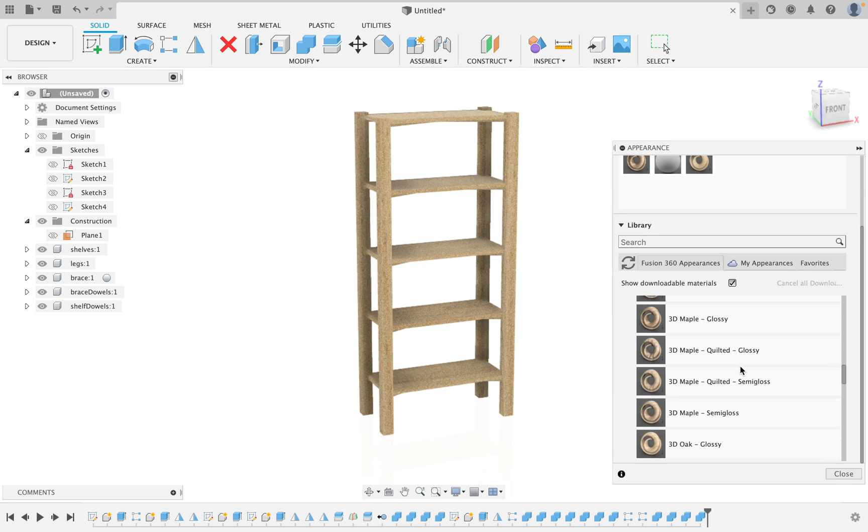Absolutely, but because this was actually a piece modeled for one of our followers, we're going to show how it will actually work in their home. It's going to be made of ash, so we're going to change the whole thing to be semi-gloss ash, because that's how they're going to finish it. And we're going to use ebonized ash on the braces to set them off, with the actual ebonized color, so it will be much, much darker. Hit close.

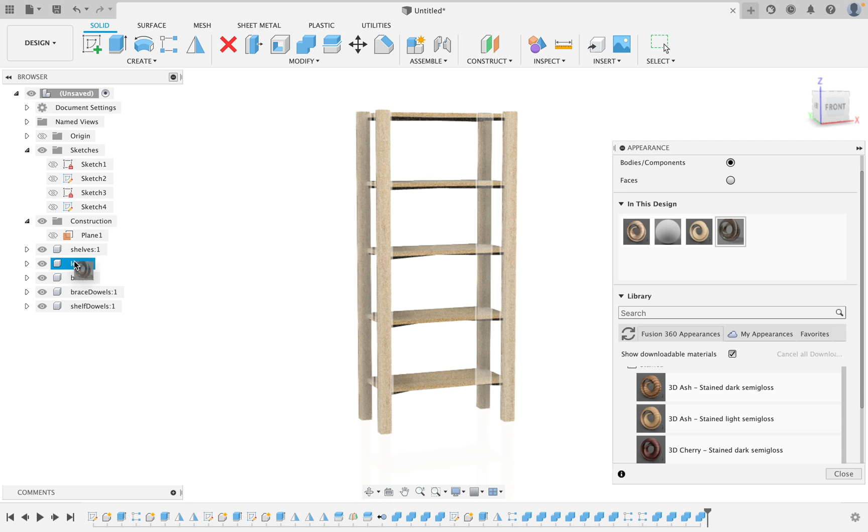Now if we look at it, we have ebonized ash on those pieces, and we're going to do the same thing for the legs. Hit close. Now we have this beautiful piece with natural ash shelves and a dark ebonized look on the support pieces and the legs. So there we have it today.